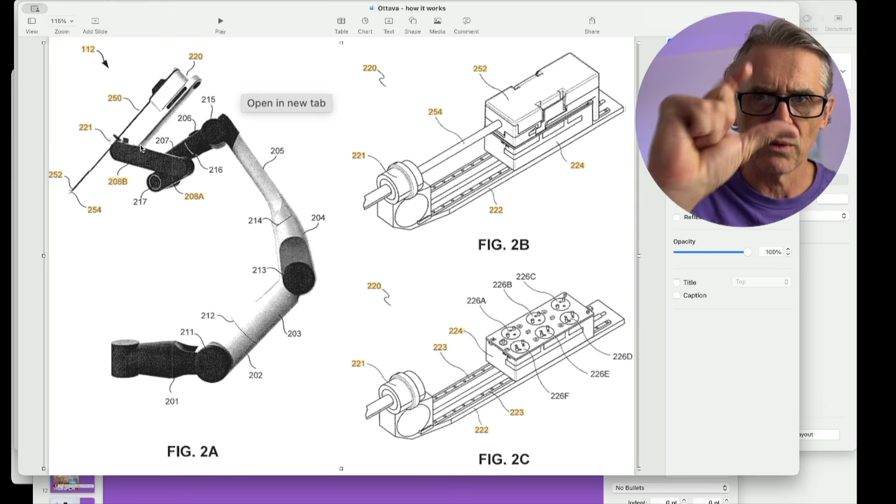But again, this arm comes out from under the bed, up over the bed and down, and points down, and then you would have the port here sitting right into the patient, and this whole thing would be moving around like this. So these are the main arms that bring the payload towards and above the patient, and this is the arm that is going to move around and do a lot of the dancing.

And this is a fairly short Z rail here, which is nice, compact, and it's not got a lot hanging off the back, which is very nice, which you can do when you're coming from the bottom down rather than coming from the top down. So one of the nice designs of coming out from under the bed is you can have a very short and compact Z rail, which you're going to need to stop clashes of instruments.

Okay, let me go here. Oh, let me go to this view here a second. Navigate and make sure I go to the right picture next.

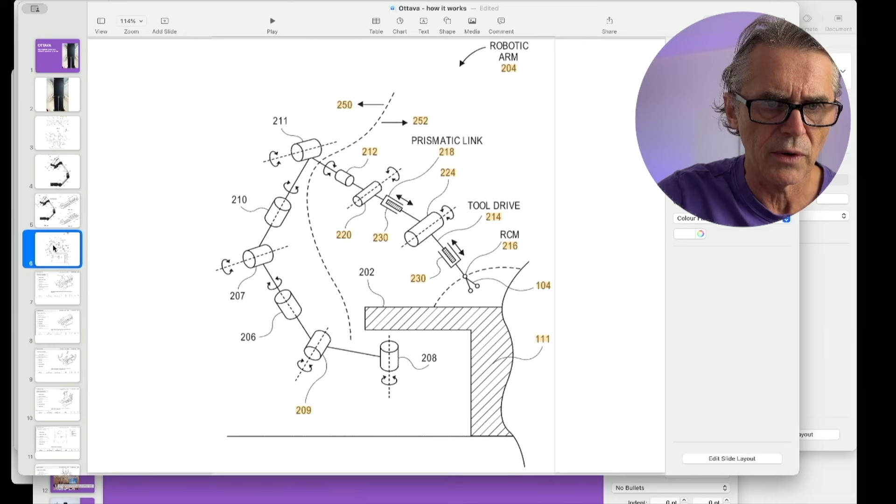Okay, come off there. So for the engineers who are looking at this, basically what they have is they have the different degrees of freedom so that the arm can rotate in different ways, so that it can swing out from under the bed. This is the bed, this is where it swings out from. So you have one joint that swings it out this way, rotates it in this plane, and then you have a different set of joints that all rotate in different ways, so that when you want the tip of the instrument to move and you move your hand controllers, the arm's got enough degrees of freedom to get you exactly where you want to go.

Very, very complex, and I would imagine, looking at this, the amount of motors and controllers you need in there, this is going to be an incredibly expensive arm to make, I would imagine, but I can be proven wrong on that. I would think it's going to be fairly complex to make, and therefore probably quite expensive.

So I'm going to put an estimate on this. You would probably need to be selling this entire table and making a profit in the early days at about, so if you look at the table, all the mechanisms, the 4 arms, the tower, the controller, probably about $1.8 to $2 million would be an ASP on this that you would need to do to make that sort of thing work, just as a guess.

Right, now let's get into the setup and everything. So this is a very interesting patent that shows some of their screens, what they called, and I think it was from the Verb days, stadium view, which allows you to see as if you were seeing everything. And I've always asked the question, how would you bring the patient in and drape them? Would you drape first, bring the patient in?

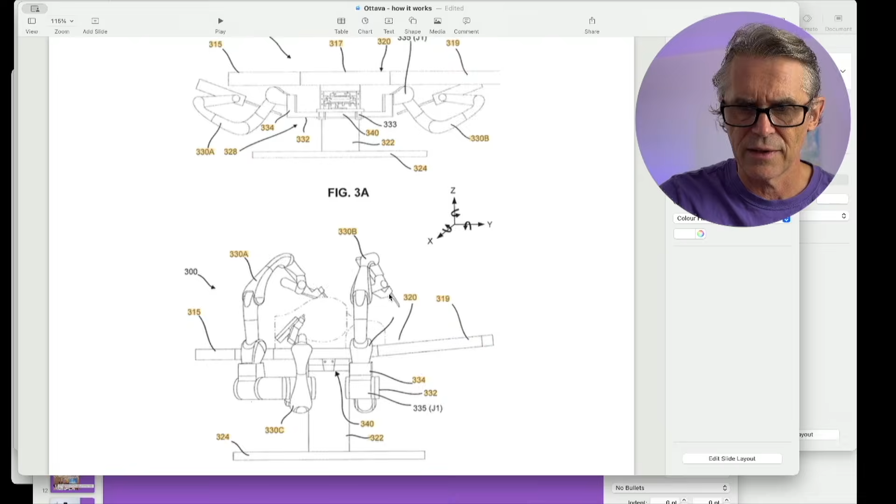So bring the patient in and they'd be positioned on the bed. So there's the legs, remember that picture we had before where we had the two legs with the split in the middle looking down, and the four arms from underneath, which is there. That's the two leg things there, and that's the arm. So it looks like they did go with that design, and then you've got the four arms underneath.

So you would first of all position the patient. Then what would you do? The next thing you're going to do is go to deploy and drape arms. So my question was, do you drape the arms first and bring the patient in, or do you put the patient in and drape the arms?

So in this reduction to practice, it looks like what you would do is bring the patient in and then drape the arms around the patient. So you'd have the four arms and you'd drape the four arms. And it says here, use the table remote control to move the arms to drape position.

So that's either going to be from the tower or they might have a remote control, and you're going to get those into a drape position. What's going to happen is the arms are going to come out from under the table. All those joints that I showed before are going to roll up, come up, and they're going to now position themselves up like this, and that's ready to drape.

And that's going to be in a position where they're out at 45 degrees, up like this, and the nursing team can just come and drape over the arms quite easily without touching the patient and having the maximal space between each arm.

Then what would happen? You go into the arm, what they call prepare the arms, use the table control to move the arms to a prep position. Now, I couldn't understand whether this was preparing the arms ready for the surgery or preparing the patient. So you prep the patient at this point, you drape the patient, prep the patient at this point.

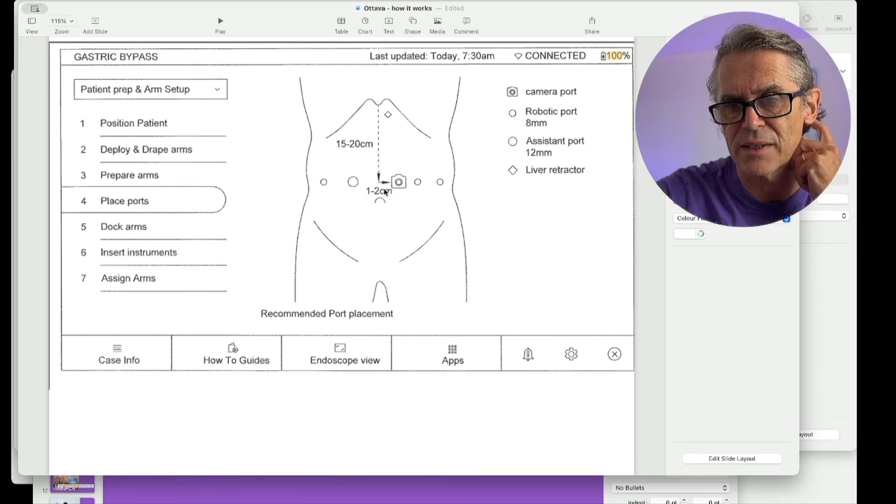Now, next is place ports. Now this is interesting, don't know whether they'll have really done this, but this is recommended port position. So it gives a view on the screen and sort of tells you where you should put your ports for the best placement. Interesting figures from this.

You've got an 8mm robotic port. So it is telling us, maybe confirming here, that we've got 8mm ports going to be used with the Ottava system, which would make sense to me. And I don't see why they wouldn't do that. They are the standards today.

Very linear port positions though, and again this is the problem of having a fixed boom, whether your boom is above the patient or below the patient. Not 100%, but you force the user to put the ports which is optimal for the robot, rather than putting the robot where it's optimal for the ports, which you get with modular systems like Versius or with Hugo or SSI. Slight differences, but that's the pros and cons of what you get.

Right, and then you're going to dock the arms. This is the point where the team around the bed will take the port positions, move the arms, and click them onto the ports. So that's the standard docking you do with a Da Vinci from above, but this one does it from coming up from below, and you dock the 4 ports on. That means the Ottava arm would be locked to the port, just as with many other robots that are out there.

Then you go on to insert the instruments. This is where you'd say put on arm number 1 the endoscope, put the grasper on number 2, a Maryland bipolar on number 4, and scissors on number 3. The bedside staff will put them on, and you'd insert the camera first, quite rightly, for safety reasons in laparoscopic procedures.

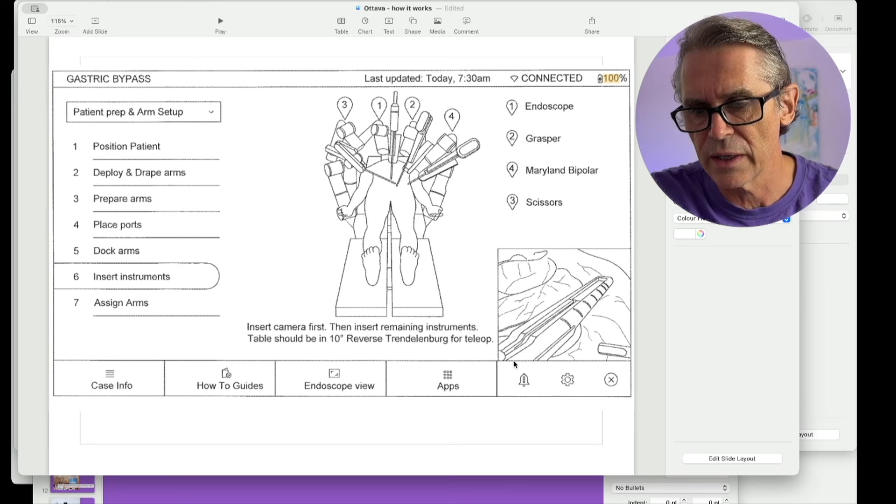Interestingly, then the remaining instruments. The table should be in 10° reverse Trendelenburg. I'm not sure what that is for teleop, but there we go. For some reason they want to put that in there. Maybe that's just for this gastric bypass. And you can see here, quite interestingly, that looks like it could potentially be a stapler, but I'll come to that in a minute. So you've put the instruments on the arms, put them into the patient, the surgeon is sat at the console.

The next thing you do is assign the arms. You'll have a left control and a right control, and you'll see the scissors put into the left controller. The endoscope is on arm number 1. The grasper is on arm number 2, assigned to the right controller. And if you want to swap that out with the Maryland, you might use the right to swap it between.

What you'll see here is one of the fears I have of these systems: just how the airspace above the patient could become quite crowded. Again, this is just a patent design, I can't say it's correct, I can't say what it's going to be, I can't say it's going to be exactly like this. But theoretically, depending on how thick those arms are, and if you're trying to do a tight procedure, this is where you have a risk of clash. I will bring up some patents about clash avoidance from all the systems, not just Ottava, in the future.

But you've assigned the arms, and now you're ready to rock and roll.

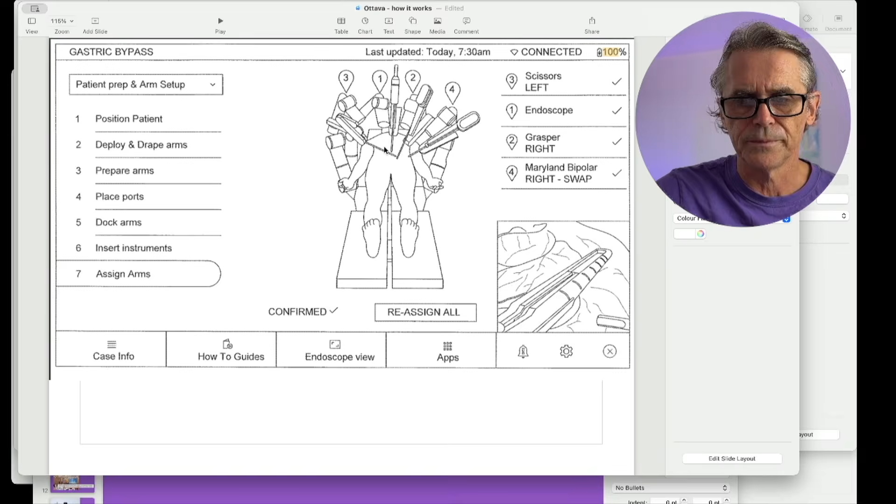And it's interesting, you have this thing called stadium view. One of the things I've been talking about is their tower, and you can go see my towers and hubs post - the tower on there is taken from the J&J patent and rendered into a real image. That's what I did, because it looks like it's going to be a nice tower, and I'm pretty hot on the whole way they're going to do it.

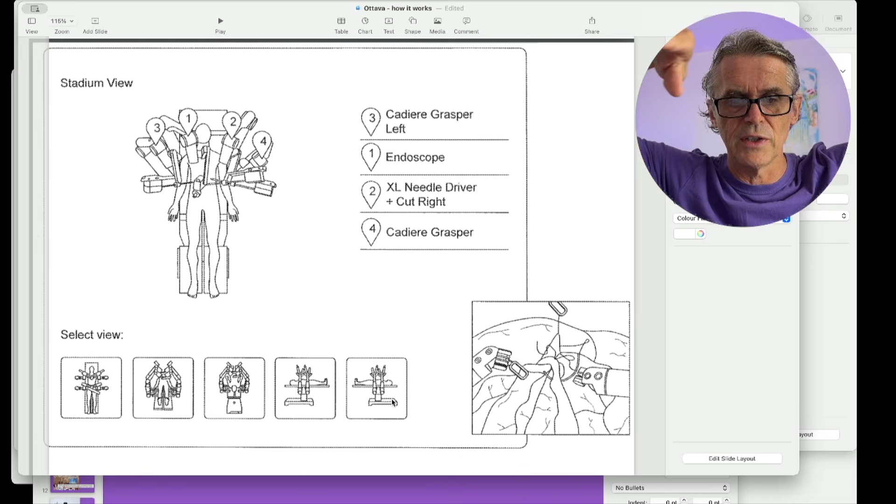So when you're looking at these patents, there's a few things to note. You've got different views to look around the room, because I think there'll be cameras mounted on the tower, and different cameras mounted around the room so you can look at different views. They'll at least have an operating room camera view, and part of that is about working on operating room efficiency in the future. I still think there's a camera in the Da Vinci that's not been turned on yet, but I'm not 100% sure on that.

But interesting things - you've got an XL needle driver and maybe a suture cut already in there. So there might be some instruments that we're all very familiar with.

This is just another view of that to show the complexity and the level of it. The reason I wanted to show this view is that it looks like it's in the prep view, which I showed before. There's a lot going on underneath the table to make this happen. And I just wonder about the manufacturing, the cost of this, the complexity of it, and servicing of it.

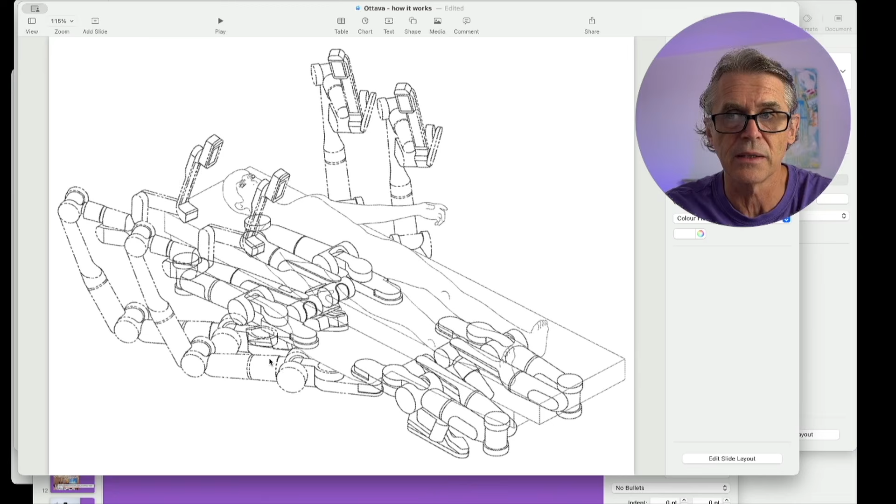Just how much fluid is going to be dropping down into those arms - I've done a lot of cases, and if you end up with fluid dropping down into these joints, they are all draped, but you start getting gravity helping push fluid down into the joints. I do just wonder about this. And again, looking at how much room this is going to take around the table, how much real estate.

The pro is that everything's on a single footprint. The downside is that footprint is big. So you've got one footprint, but it's a big footprint, and the operating room staff have got to get around this.

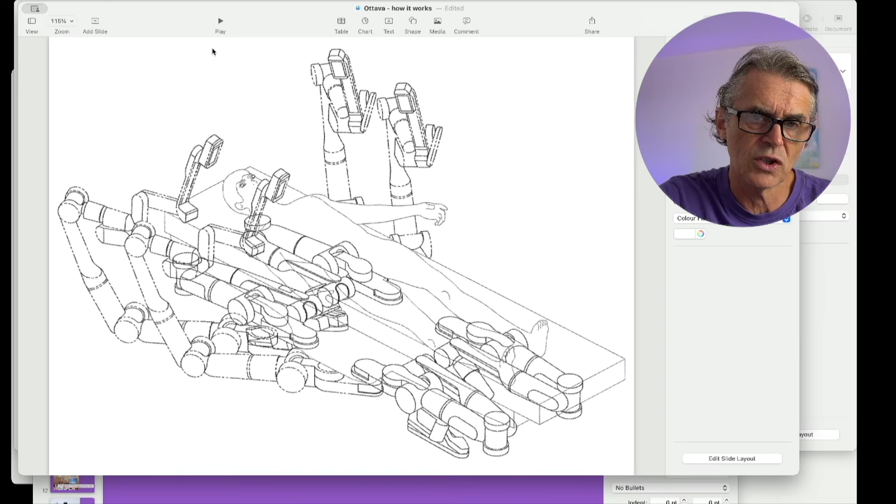I don't want to be picky here because I've not seen it used in real use, so it's hard for me to say. I don't know if it's much worse than some of the other modular systems out there, but it's definitely not as good as what you get from coming above down with a boom. This is really just an inverted boom if you look at it that way.

There you take away all the gubbins so you can see, take away all the see-through, so that's what it'll sort of look like. It looks a lot less busy, and there's some room around there for the patient, for the bedside staff to get around. So maybe it's not going to clash.

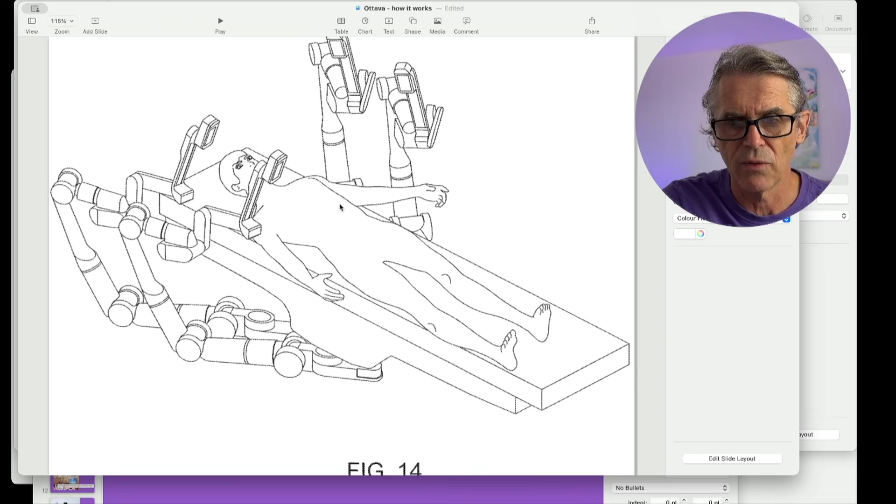And you're going to be able to assign different functions to the different instruments. And that was it, really. So I know I went through that fast, so let me do that again very, very quickly.

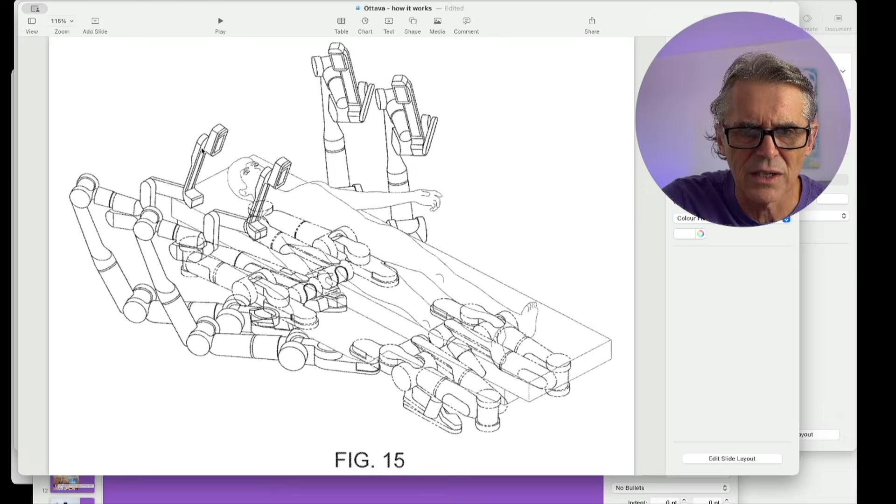There's the arm. Imagine four of these around the bed. You bring the patient in, you add whatever you need on the side rails of the bed there. You'll then deploy the arms out. You'll press a button on a remote or on the tower, and the arms will come out at 45 degrees.

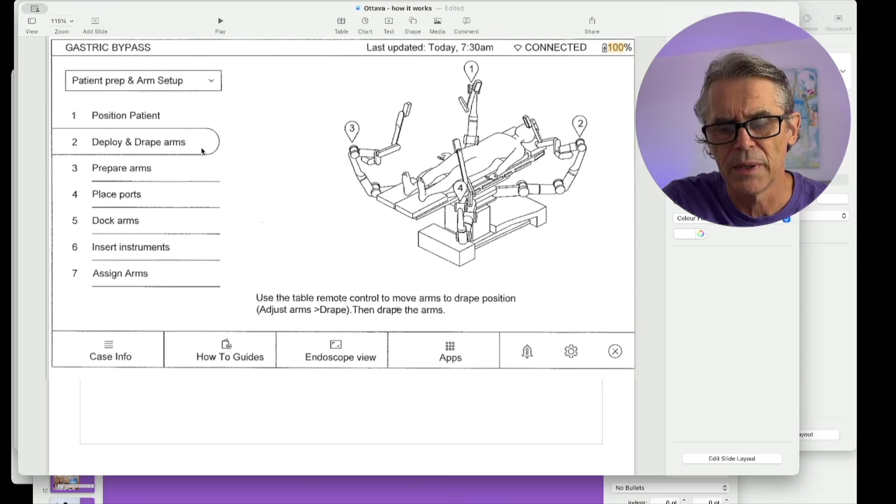And they'll pop up. The staff will come in this pattern. They would then drape the arms all the way down to the base. They would then put them into a prep position, which I think is to prep the patient, so they would be able to get to the patient, prep the patient, and get the ports in.

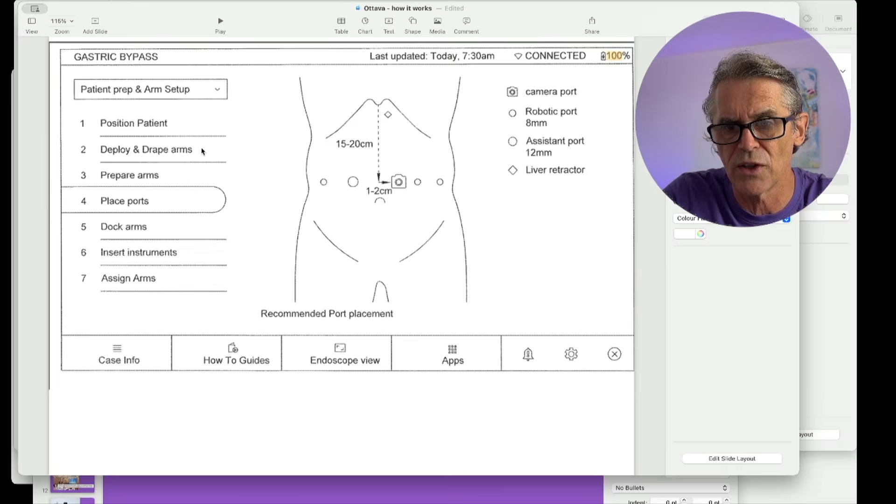The surgeon would be down there. Maybe for a different procedure, they would all come to the bottom of the patient. You would place the ports as suggested. And because you're more or less where the port should be, when you put it to the docking position and go to the procedure position, depending on which procedure, those arms will spread out to the right area — a little bit like Moon Surgical does today, basically getting those arms into the right position.

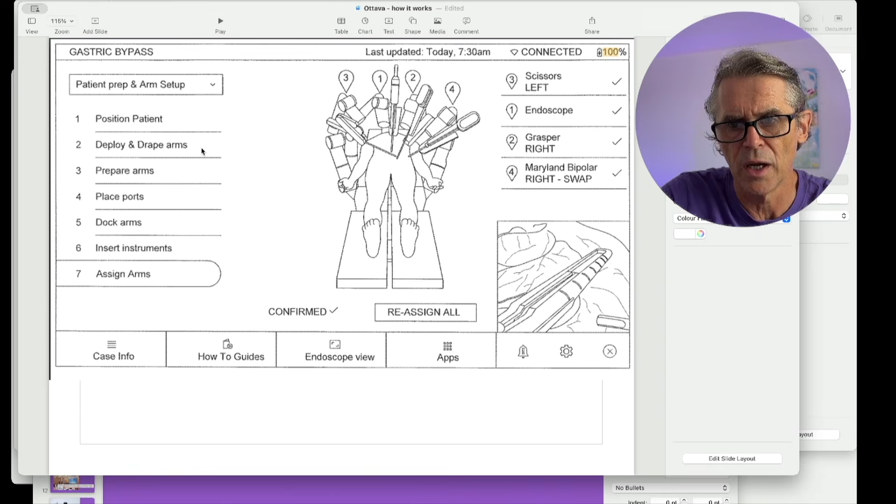And then you'll click the instruments on, click the scope on, put the scope in first, put the instruments in, and then the user will assign them up, and you are ready to do the procedure. And that's it, really — that's what I kind of wanted to go through today.

Again, I can't guarantee that this is actually how it's going to be. This is one patent that I've searched, and the fact that it's come up again recently usually means it's coming to practice. So I'm going to put a little bit of a bet down that's probably the workflow of how it works, or very, very similar. I mean, why wouldn't it?

But my big question always was, do they bring the patient in, prepare the patient, then drape the arms, or do they drape the arms and then prep the patient? I think they're going to prep the patient after they drape the arms. And that just shows you basically some of the workflow.

I hope you found that interesting. It was just a little one I wanted to knock out today, because I've had so many people ask me over the last 6 to 8 months, yeah, but how could a table arm work? How could a set of table arms work? Do you click the arms on? No. Hopefully that shows it, and that's clear.